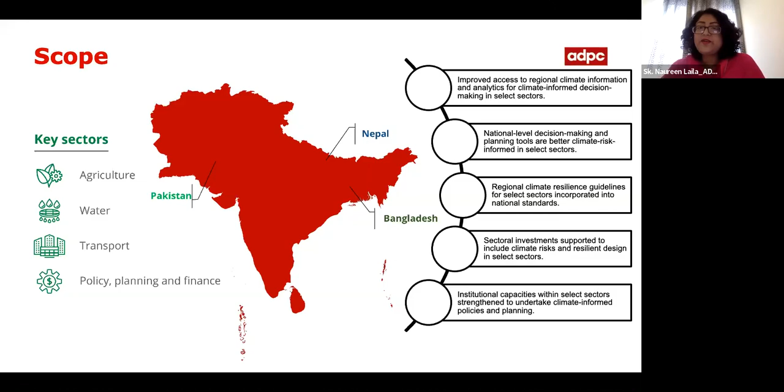This project is currently working in 3 countries: Pakistan, Nepal, and Bangladesh. For the resilient transport sector part, ADPC is working in Nepal and Bangladesh. Today we are here because we understand that the concepts and standards of resilient transport sector are a new and unique concept, and we want to build consistency and sensitization on the topic. This will be a platform where we can ask questions and get everyone on the same page, so we can start building our understanding on how to make our transport sector more resilient.

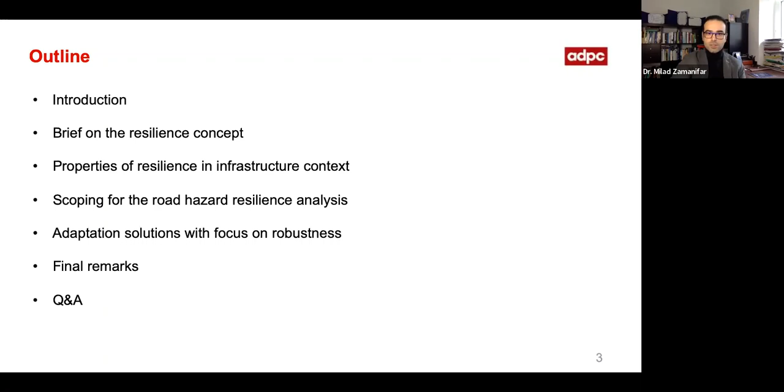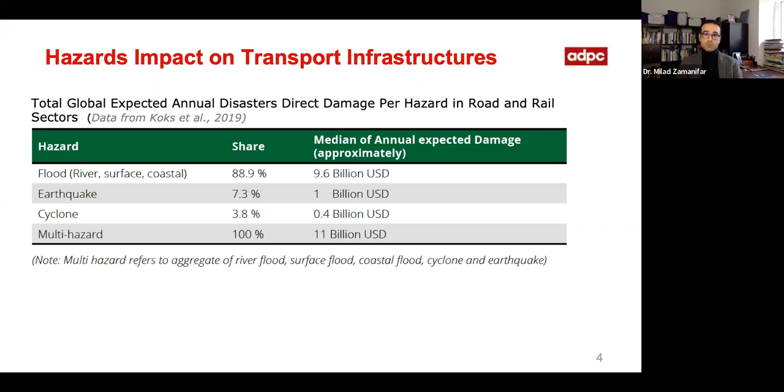I think we all agree that the adverse impact of hazards and stressors related to climate is substantial, directly contributing to economy, maintenance costs and rehabilitation. That's why we're all here today. I don't want to preach to the converted, but as we know, it's a global challenge, and South Asia is not immune to the exposure, impact, or risk from climatic hazards and stressors, particularly hydrometeorological hazards, which are our point of interest.

You can see how the situation in South Asia regarding exposure is quite critical. Of course there are various hazards. Among them, the main one known to us as civil engineers and people active in road engineering is traffic load and axle loading, which causes distress and deterioration to road infrastructure.

But for the US, for example, where climate data is already integrated into the design process, it's estimated that 36% of total damages for flexible pavements can be attributed to environmental factors and climate parameters, and 24% of total damage for rigid pavements.

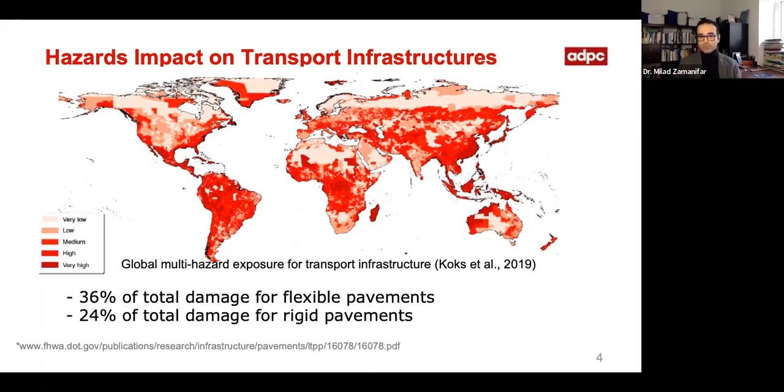It seems that hydrometeorological hazards are changing at a rate faster than our adaptation process, and the same goes for the vulnerability of assets. It's commonly acknowledged that road infrastructures are vulnerable to several climatic and non-climatic factors. Among those, we identified possible ranges of susceptibility to hydrometeorological hazards and climatic stressors in the context of road infrastructure under the CARE for South Asia project, mainly focused on this region.

I don't want to talk too much about this because I think we're all on the same page about how hydrometeorological hazards and climatic stressors impose damage on different components of road infrastructure. Not only climate stressors, but also those stressors believed to be increased or pronounced due to climate change, which road assets will undergo during their design life, but for which they are not designed.

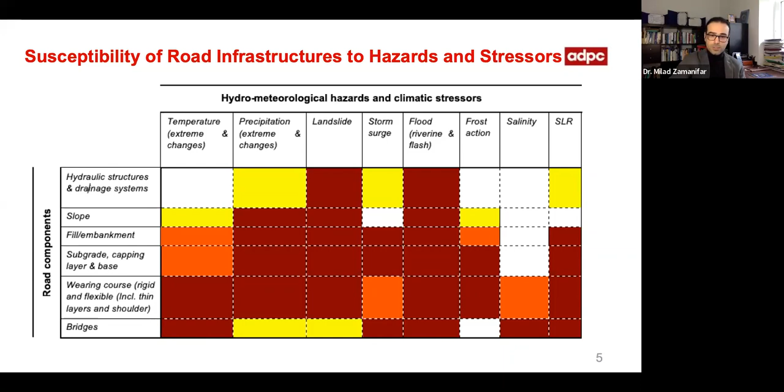Among those, we can somehow speculate that climate change for some assets in the long run would develop more susceptibility, which directly translates to maintenance and rehabilitation costs. Although we can't really figure out the exact amount, the exact extent is unknown, but the trajectory is showing an incremental trend.

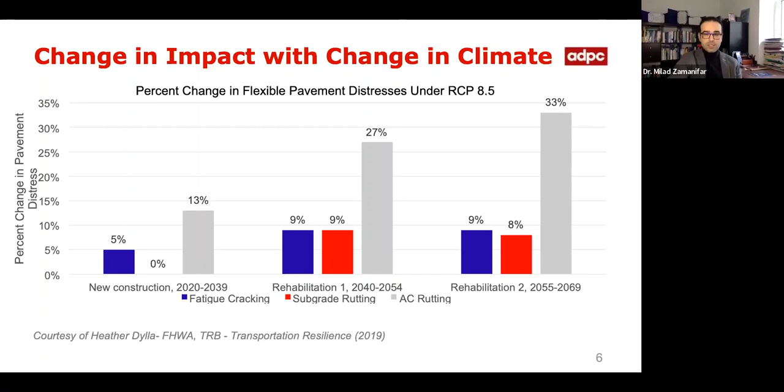In the worst case scenario, it's valid for a flexible pavement that distress will rise in the future, specifically with regard to fatigue cracking, subgrade rutting, and AC rutting. Of course, bleeding, raveling, and other deterioration would also increase, but this limited study focuses on these three agents.

So that's why resilience is an interesting concept. It's an interesting concept in engineering for us. The lexical, dictionary definition of the term resilience goes back to its Latin origin, which means springing back or bouncing back.

The resilience concept was born through engineering, mainly mechanical engineering and material science. However, it has been mainstreamed through ecology and developmental psychopathology disciplines and domains.

In the field of developmental psychopathology of children, Professor Garmezy, somewhere around the 1940s and 1950s, started to study disadvantaged children who experienced some sort of trauma and stressful life events—war, abuse, violation, hospitalization, drugs, and so forth.

He found that some of the children, statistical outliers, despite undergoing extreme distress and stressful life events, ended up just fine. They grew into healthy adults, healthy in the clinical sense, not exhibiting markers attributable to psychological disorders or diseases. So he named them resilient individuals.

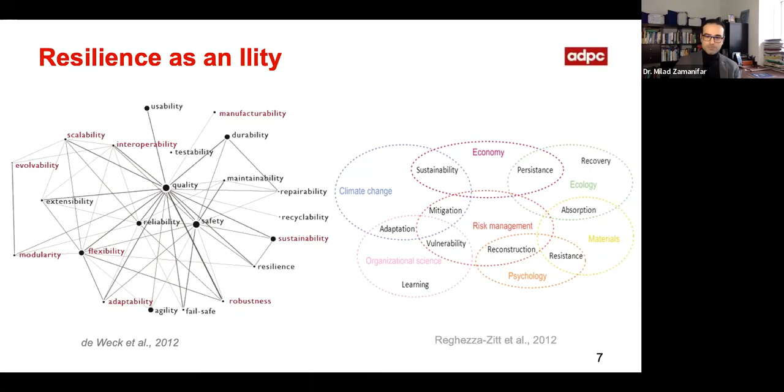Therefore, it has huge conceptual fluidity—various definitions, numerous properties, capacities, principles, dimensions, and conceptions. For example, some research discovered over 119 different definitions for resilience, and that's only until 2010. When you look at the infrastructure resilience domain specifically, it can almost reach 50 different definitions with numerous properties.

So you can see some of these properties listed here. Mainly four properties that Bruneau in 2003 suggested have been welcomed within the engineering community, such as robustness, rapidity, resourcefulness, and so forth. So the art here is to draw boundaries and limitations to the scale and scope of the investigation of resilience.

Resilience of what? Resilience to what? If you're talking about community resilience versus asset resilience, there are differences—because if you're talking about asset resilience, we probably have limited capacity to include dimensions like organizational or social dimensions. First, there were the four properties.

Later on, the learning capacity was added, but the problem is that 'learning' doesn't have an R to actually fit into the '4R' framework. Therefore, we can see the learning capacity alongside resourcefulness.

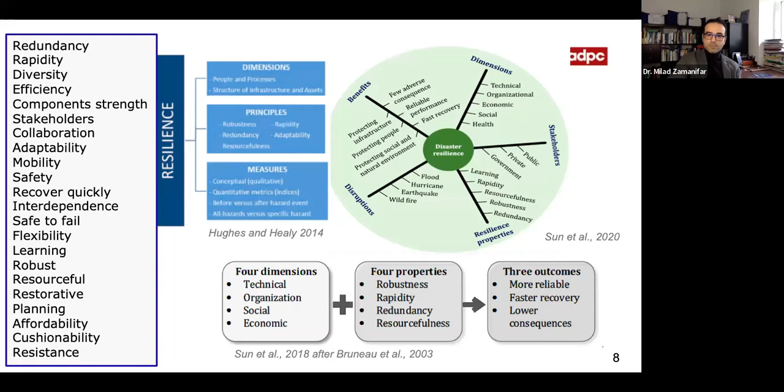We'll later on discuss more about the properties of resilience. So let's now talk about the definition.

When we look at the FHWA, Federal Highway Administration, they offer a definition: the ability to anticipate, prepare for, adapt to changing conditions, and withstand, respond to, and recover rapidly from disruption.

So it's kind of an ideology. It's more of a goal than an objective. It's overly generalized as an ideal concept rather than something that can really help us use it practically. There's too much expectation from the concept of resilience. So how can we develop road infrastructure that can anticipate, prepare, and adapt? That's where I think the problem lies.

A number of scholars and authors have expressed concern about the use of resilience as a fashionable term of late, as a buzzword, as a non-operative concept in the engineering format.

Technically, road agencies are charged to react to mandates from the policy level, from users, from the public, to respond to the mandate of resilience building without a practical tool or definition. So personally, I can understand why decision makers in road agencies are reluctant to go through with it.

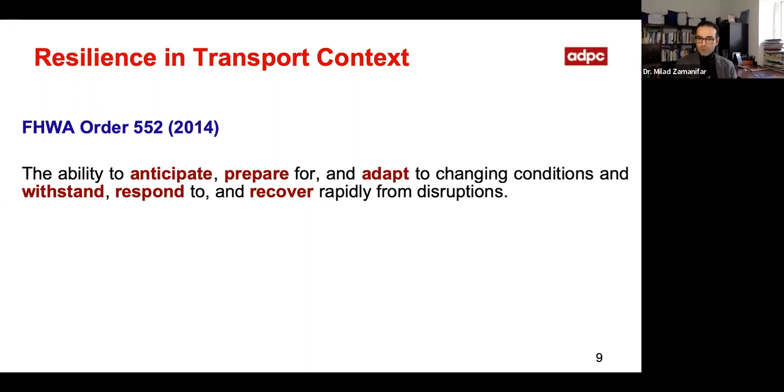Later on, in 2016, through the summit in 2009, AASHTO actually provided a more practical and easily conceivable definition: the ability of the system to provide and maintain an acceptable level of service or functionality in the face of major shocks or disruption to normal operations.

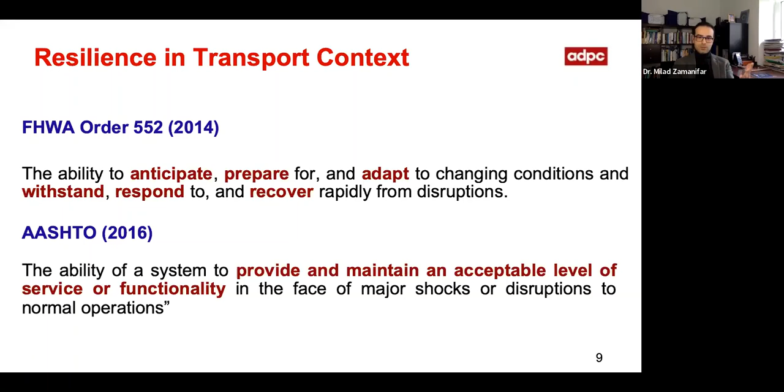That, of course, is more conceivable, but yet it does not touch on the ability of the system to react to the shock, to the hazardous event.

Here, in a seminal paper, Professor Ayyub, who I believe is at the University of Maryland now, provided a concept trying to integrate various elements. As you see, it's always about performance—some attribute that can reflect the performance of road infrastructure. You might think about performance in your area of expertise: mobility, travel time, physical condition, some sort of performance indicator that reflects how the road asset is servicing the user.

You can see that when performance drops after the strike of a hazard, it's not always that it drops significantly or that the loss occurs in just one moment. Depending on the robustness of your road asset, depending on the strength and physical condition of the asset, this can be brittle, ductile, or have graceful degradation. That graceful degradation is what we are really looking at.

Think of a landslide, for example—that's an F1, that immediately closes the road. Think of, let's say, rutting—it might come after a summer of extreme heat. It does not immediately exhibit itself as road damage.

Afterward, there's a recovery, shown in the blue arrows, indicating how fast we can restore our road asset or road network. Let's think now that resilience is not limited to the asset level—it's a network-level property. So how fast we can actually restore it matters.

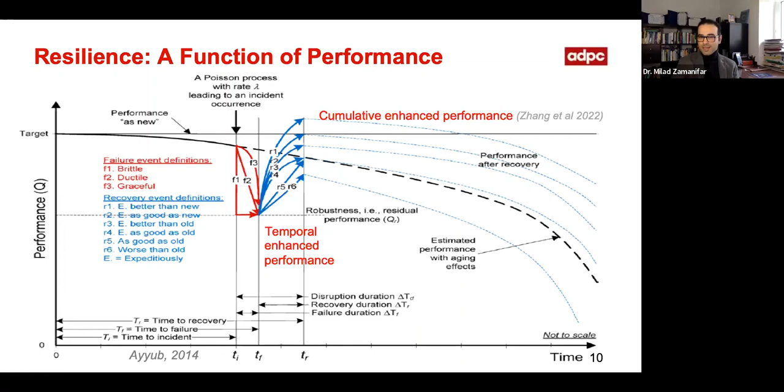At the same time, in the post-event phase, the more restorative, the more prepared and ready we are to recover the assets from degradation, the more resilience also increases. So here we're talking about the temporal sensitivity of the resilience concept. It's very important—one of the most important arguments within the definition of resilience, seeing it as a property sensitive to temporal periods and characteristics.

Resilience measures can be either ex ante, related to activities before the event aiming at reducing hazard impact, or ex post, relating to anything that happens after the event. In ex ante, robustness contributes a lot, and redundancy too—so redundancy and robustness sit in the ex ante phase before the hazard and can be reached through preparedness activity.

While rapidity comes just right after the hazard, resourcefulness contributes to both phases. For example, if you remember the West Germany flooding last year, around July, they were relatively strong in post-event measures—everything was quite good—but they failed to build redundancy and robustness through risk assessment prior to the event.

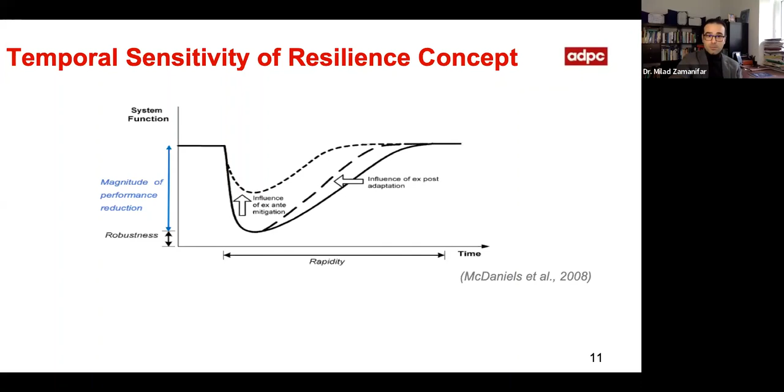So if we fail in one of these phases or properties, we actually plan for failure. Both phases, ex ante and ex post, should be developed simultaneously. Ex ante is before the adverse event, ex post is after the adverse event. However, that's only valid for sudden onset hazards, for example flash flood or earthquake.

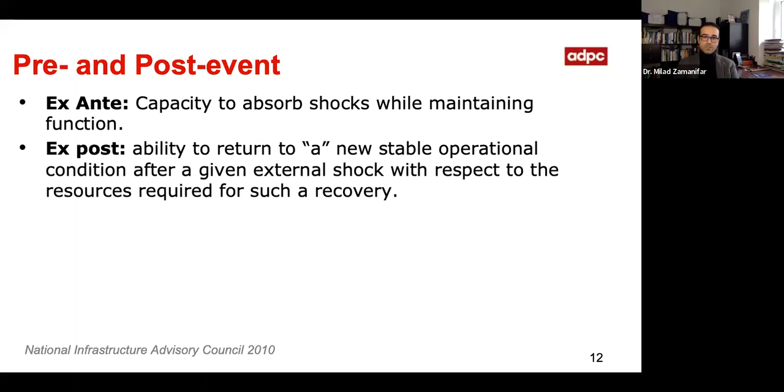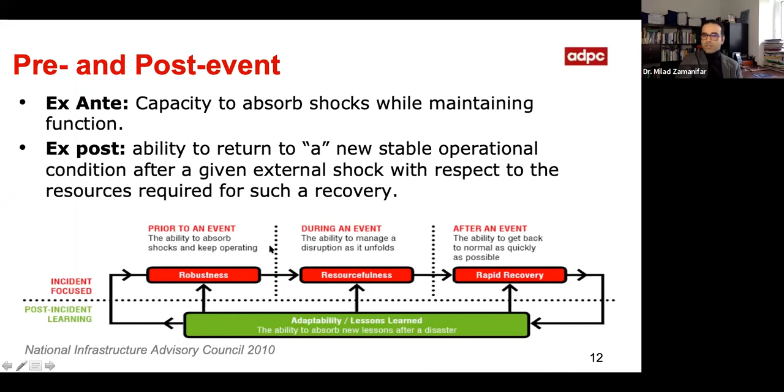But in road infrastructure context, we also have climatic stressors that act as slow onset hazards, like extreme temperature, heavy precipitation, monsoon seasons, where we don't see immediate failure of the system due to the hazard, but it reflects itself sometime later, for example as stripping or raveling. Therefore, some research discusses how we should also consider the during-event phase. So this temporal sensitivity is actually recognized vastly in the community.

So I finalized here that the concept of resilient infrastructure can be perceived as a degree of possessing a set of capabilities, abilities that indicate both properties and behavior of the system. If we are talking about ex ante, we are talking about the static behavior, static properties of the system. We are talking in a descriptive form, describing the current condition of the asset. That's what we are interested in.

We are talking about the state of the system regarding current condition and how it can withstand hazards. Or we talk about ex post, mostly interested in what the system does after the event. It's dynamic and normative. Normativity indicates how it ought to be, how it's expected to be, relating to the behavior of the system in presence of a certain major shock, until it relaxes into a new state of equilibrium.

From this comprehensive reach that we are expecting resilience to cover, we are pushing the concept of resilience to address somehow a wide spectrum of expectations, and it's difficult to arrive at operational indicators with this wide spectrum.

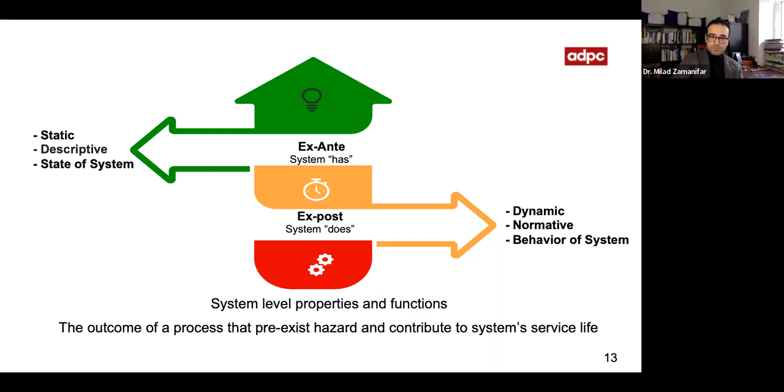Therefore, here is what scoping can provide: strategic decisions. It's documented that reports show a failure rate of 50%. It gets worse once we use multi-criteria decision making, where we have different attributes, different decision factors involved.

So without proper scoping and limiting the boundary of the problem, we won't be able to solve it with reasonable computational complexity. But most importantly, we would not find the opportunity to understand the problem without disaggregating, breaking it down, and downscaling the problem through scoping.

For that, the most critical step, I would say even the most often ignored step, is scoping. We call it here scoping, but the original term would be problem structuring. It is advised in the decision analysis literature.

So infrastructure resilience scope starts with the dimension. We previously showed that it can be social, technical, and temporality, ex ante or ex post, before the event or after the event. Then the hazard system: whether we have a multi-hazard approach or focus on a single hazard, and whether these hazards are all climatic, or a mix of non-climatic and climatic.

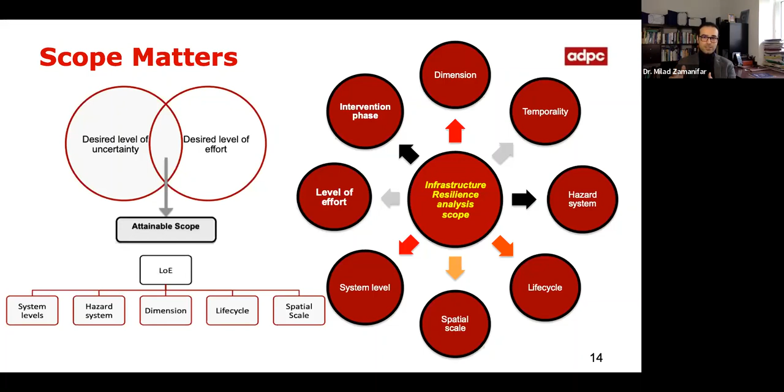All the temporality, all the intervention phases like preparedness, recovery, multi-hazard - although that's what we seek, that's what we always hear from keynote speakers, that we need multi-hazard, all-hazard included, life cycle, system level thinking. But when you put it on paper and really try to do that, you realize you end up with a result, but the result is not associated with sufficient reliability and sufficient certainty to be used at an operational level.

So let's talk about the properties now. They are very important. Just a moment.

So redundancy, as we know, is the buffer capacity—that's quite a clear property. If one component fails, another one compensates. Let's say if we have a flash flood, a design flood, we provide some additional culverts to compensate if the real flash flood exceeds our design flash flood.

Or reliability-based design, where we introduce a factor of safety, some sort of coefficient that brings our design parameter a little bit higher. Alternative routes for critical nodes: when we have a node that is significantly important for us, for example, providing water to the community or connecting the community to basic care, we would like to have some sort of contingency plan.

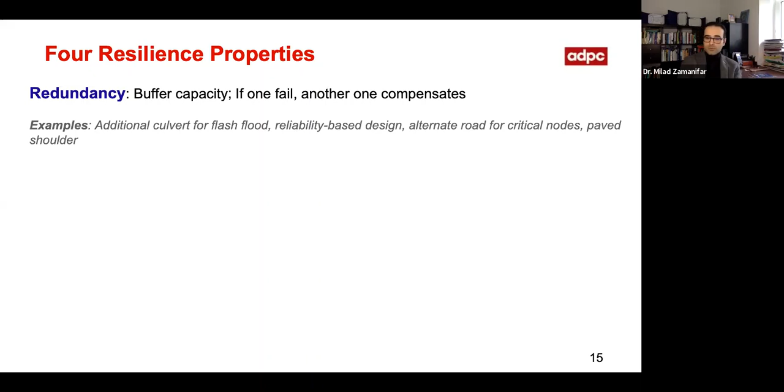Paved shoulder: if a landslide occurs, for example, the opposite shoulder can be used as a driveway. Then let's talk about...

Rapidity. It's very simple—it's quick recovery. There is a huge amount of literature, for example, about recovery planning since 1970. At that time they didn't use the term resilience. So here we should signify the difference between the concept of resilience and the term resilience. In disaster recovery planning, the concept of resilience has been used since 1970, but not the term. However, these days the term has been used significantly, but the concept is quite missing.

Another one is resourcefulness. That's a little vague—something difficult to quantify, but it's sort of addressing navigating resources and intervention in response to a shock, or for preparedness before the adverse event, and of course during an event. Like anything related to planning, finance, policy, knowledge, standards.

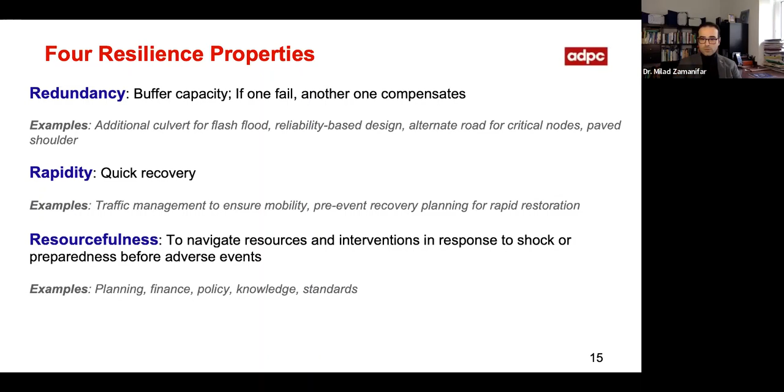So in the Care for South Asia project, we actually have different sectors approaching the concept and property of resourcefulness in the resilience approach. Robustness is what we are more interested in.

It's about the structural strength and integrity of the asset, the extent to which the system is not driven to zero. It's still performing—although the shock is there, the stress is there—but the system can still provide some level of service to the users.

For example, polymer modified bitumens that can improve the strength against extreme heat and rutting. Rigid pavements show quite a good performance regarding inundation. Of course, we should not naively consider them as fully resilient pavement. Anti-corrosion material in the maritime environment, and of course the maintenance regime that we want to take over.

So why do we need all these properties for our analysis, and why do properties matter? They matter because they allow us to disaggregate an abstract concept like resilience, breaking it into small parts, to a more analytically tractable and understandable component. They are also important since they assist with navigating proper attributes, defining the attributes, and evaluating resilience for our assets. So selecting properties is a primary target of the scoping, and is a very important step toward arriving at indicators and measurement of resilience.

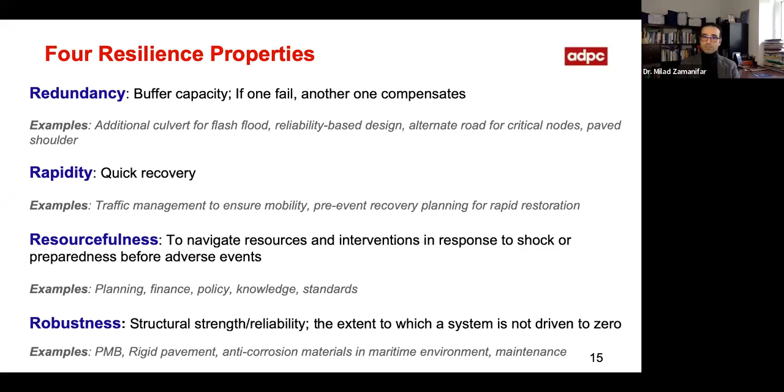So here we want to go more technical, and we want to go through some examples. For that, let's think about extreme precipitation and the impact on road assets. There are, of course, various failures that can occur relating to different components of the road structure.

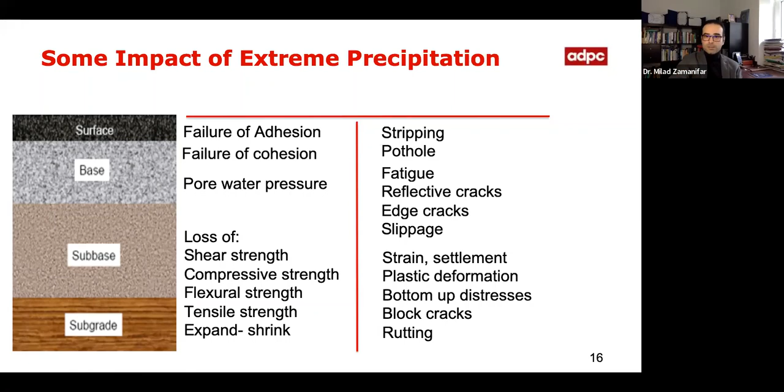Is it in the surface, in the base? For example, capillary effects, the impact of trapped water between the base and sub-base, swelling and shrinking of the soils—they can show their effect through different distresses: stripping, pothole, fatigue, reflective cracks, which are bottom-up deteriorations, and so forth.

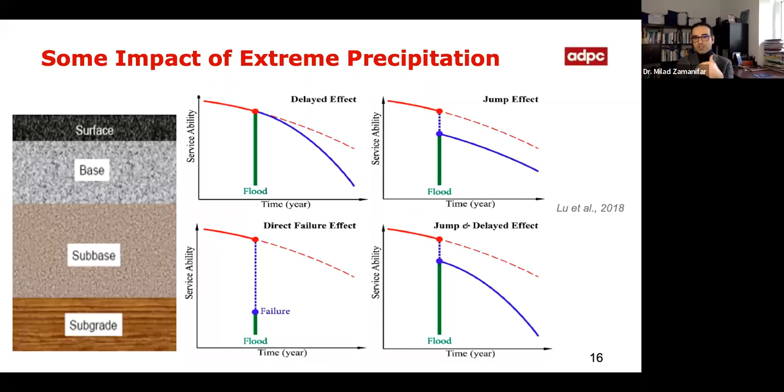What we should actually consider is that not all the adverse effects emerge immediately after the stressor. Some of them are delayed; some we just see after a season, after a winter or after a summer, for example. Some have a jump effect, some you can immediately see the effect—for example, force of water, flood, it's totally destroyed and you see it immediately. And some of them have both properties: you see the immediate effect, and they also impact the rate of deterioration in the future, so the damage will continue to impact the road.

So I would like here to hold a quick quiz, but first I would like to explain about different pavements. Let's say that we are decision makers, we want to make a decision, or design engineers, and we have three options.

We want to come to an understanding of which option is more likely to be resilient to heavy precipitation, because we already made a study and realized that the road we are doing in this area is exposed to heavy precipitation.

Option A: asphalt concrete, 40 millimeters thickness, with 19% air volume, using bitumen of 67 penetration grade plus 0.3% polyamide. Base has a 10% fine granule base.

We will use undersill, edge drain, and under drain, and subgrade arriving at a CBR, California bearing ratio, of 9%. The soil of the subgrade is sand.

Option B, however, is a little thicker, quite dense with 4% void, and has a really strong binder bitumen because it is modified with SBS 5%.

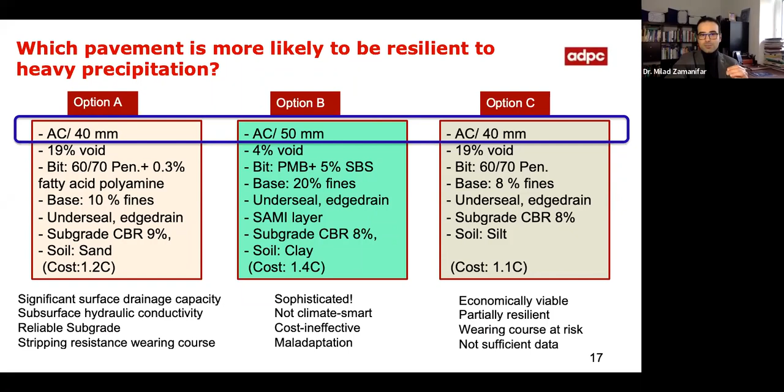Now let's zoom in, just for the wearing courses. Let's see how a small change in a small component of our road pavement system would change things. Which wearing course, which top cut, is more likely to be resilient to extreme temperature this time? I'll explain a little bit.

The first option is grade 0 to 11, very dense, 2%, thickness is 30 millimeters, and bitumen content is 6.8 - quite a rich mortar mixture. It's a void filled bitumen, 82%, with a high filler content, 9%. But Marshall stability is 900 kilogram, and it's a gap grade.

Second option is dense grade again, less bitumen with a high Marshall stability. Option 3 is 40 millimeter thickness, bitumen content of 5.3, with a Marshall stability of 960. This is an open grade, like porous asphalt. The middle one is the usual conventional asphalt concrete, AC. Option A is a gap grade.

So what do you think about the extreme temperature sensitivity of these three options? Would you please pull up the poll?

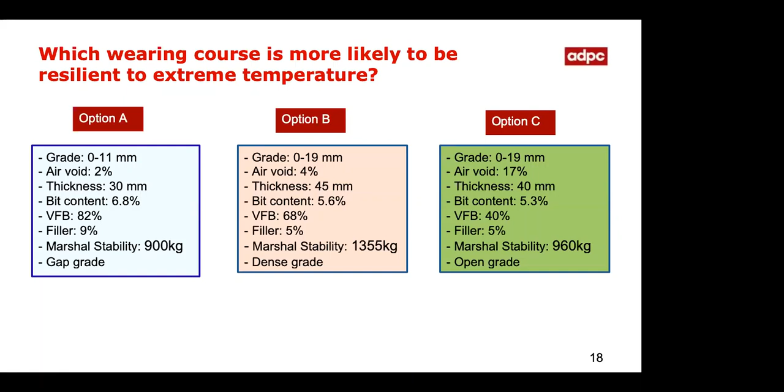I think we have the answers, Milad. You can see the poll results, right? So I think, as usual, just like last time, option B got the highest vote - 45% of people voted, then C, and then A. So please, let's see.

Option B has a very low mechanical resistance, with a very low filler content. It's easy to apply and rut sensitive. But of course it has high Marshall stability because the VFB is a very determining factor. Given the good bitumen content and thickness, it provides a reasonably good Marshall stability. But it is rut sensitive, and very easy to apply. I would say it's a very interesting option, so I would take it as a second choice.

Option A is significantly rut resistant because it is gap grade, and gap grades are based on the stone skeleton structure - stone by stone by stone, with a high share of coarse aggregates and a high share of binder. It's not only expecting structural resilience from the binder mix of bitumen and filler, but also from the stone structure that provides great rutting resistance. One example would be stone mastic asphalt. It's relatively expensive, maybe 1.3 times conventional cost, but it is an efficient and cost-effective option.

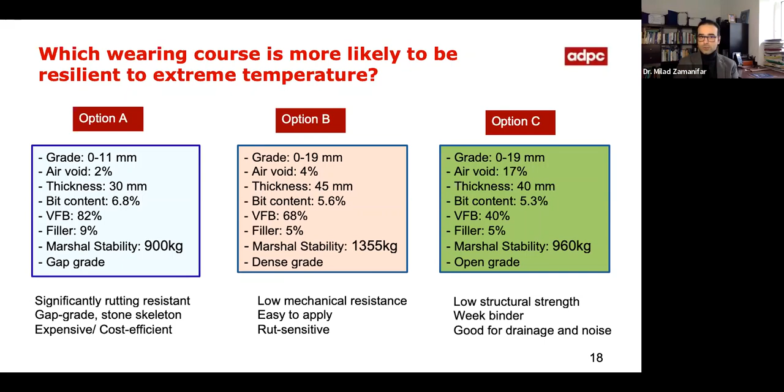So let's go back to the first question, and now let's include both precipitation and temperature as a hazard system. A hazard system is how many hazards we include in our basket of hazards to study. In this system, we have two hazard agents: precipitation and temperature. I think that might be, for example, the case in Bangladesh.

Same options as the first question. If you remember, we speculated that option A might be the good option. But what if we add extreme temperature to the precipitation in this form? Which option would now be more likely to be resilient to both heavy precipitation and extreme temperature? I think after 5-10 seconds you can open the polls.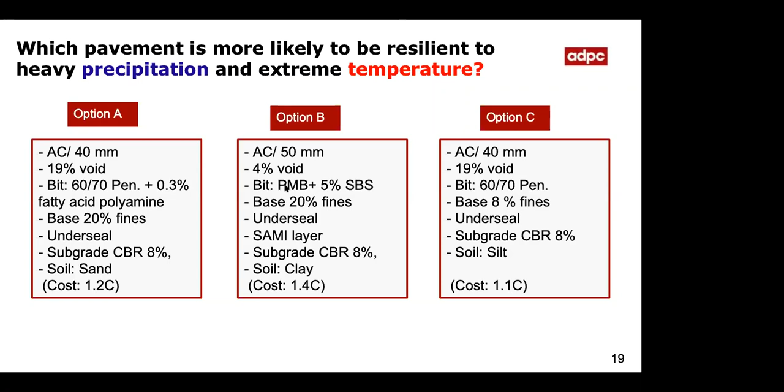Great, I really appreciate that you participate, because it matters that we put thought into this - even just a few seconds of thinking. Sometimes in practice we don't get the luxury of having more information than what we have here. But of course we need more sophisticated investigation; we need to get much deeper and investigate the problem in a wider spectrum.

But sometimes the reality is like this. Let's see the options here. Option A is a very great option for extreme heat, but for heavy precipitation, it's the other way around—it's very good for heavy precipitation, as we discussed in the first question, but not a good one for extreme heat, because the anti-stripping agent does not really increase the strength of the binder, only reducing the moisture sensitivity. And since we have a high air void, that means we are very rutting sensitive.

Option B, on the other hand, is very good, because it's a polymer modified bitumen. It shows significantly good behavior regarding extreme heat and rutting. But as we discussed in the first question, it is not a good option for heavy precipitation. Option C, however, is definitely not good for extreme heat, and for heavy precipitation we need more data.

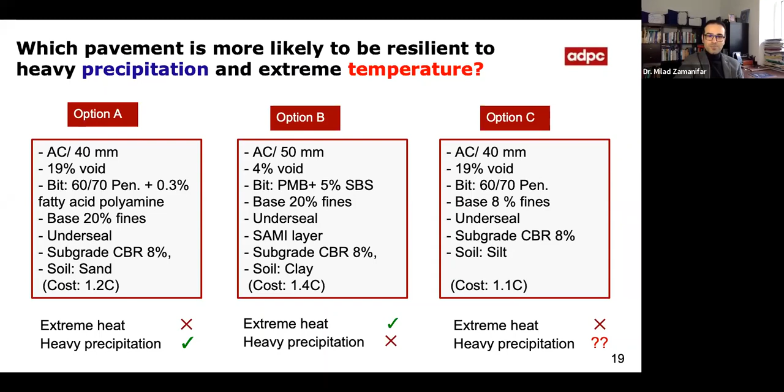So let's go back to the scope of the resilience analysis here. The idea is that we want to reach from the scope to the properties. We select the properties based on the scope, and from the properties arrive at the attributes, which we can somehow select among, and then go to each road section and do the screening, collect the data, and provide an evaluation that gives us an impression of how resilient our asset under investigation is.

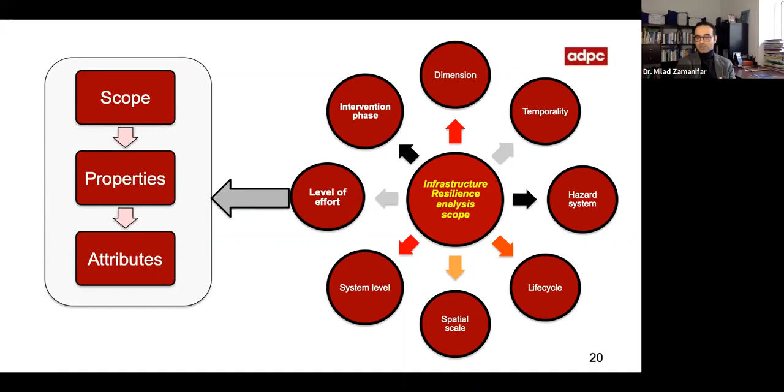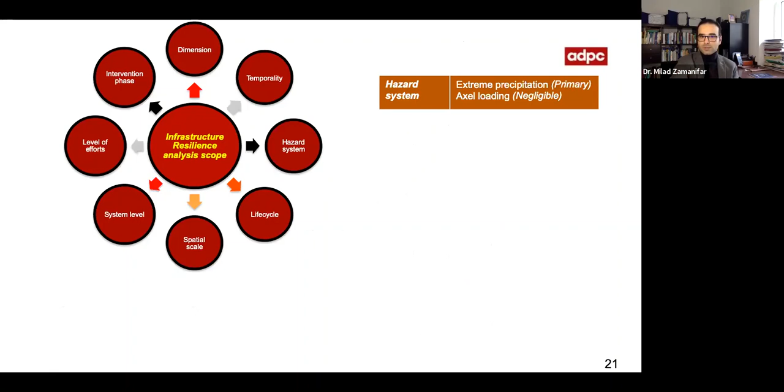For that, let's have one example. Let's say we choose the hazard as extreme precipitation primarily. Of course, the hazard system is not just about one hazard—that's important also in design. We should not just take one hazard as the leading governing factor, but always consider the combination of hazards. Let's say, for the life cycle, we consider climate change, recognizing its impact on the asset at 80% of the design life.

But of course we should consider that when the design life is 10 years, the impact of climate change regarding extreme temperature is almost negligible. In 10 years we design the road assets, but for assets with a longer design life, like a bridge, culvert, or highway designed for 30 years, we should absolutely take into account the impact of climate change.

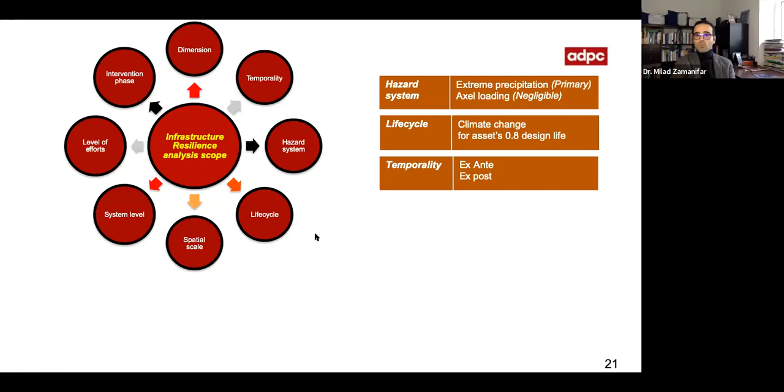And for temporality, we would like to evaluate our assets based on ex ante and ex post—before and after the event. The system level would be pavement system. We also want to look at the network level impact, and the spatial scale would be rural and at the province level. The dimension would be just technical—we don't have the luxury of evaluating all possible dimensions. And level of effort is a concern for everybody.

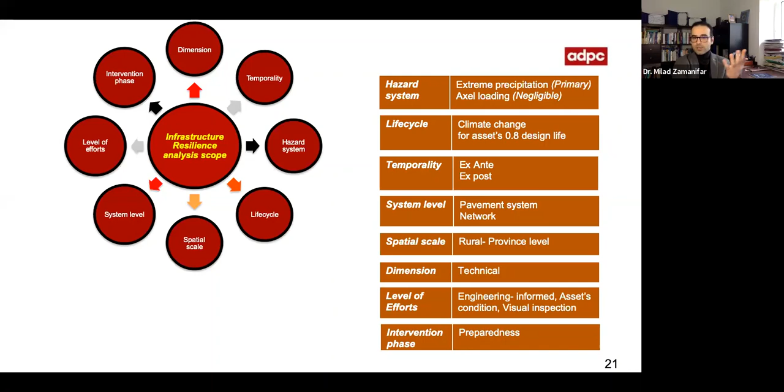We don't want to conduct really sophisticated modeling or lab tests. We want our experts to go on site, observe the asset's condition, do some survey, visual inspection, and provide engineering-informed data. The intervention phase is preparedness, meaning in this evaluation we choose not to look at recovery capacities.

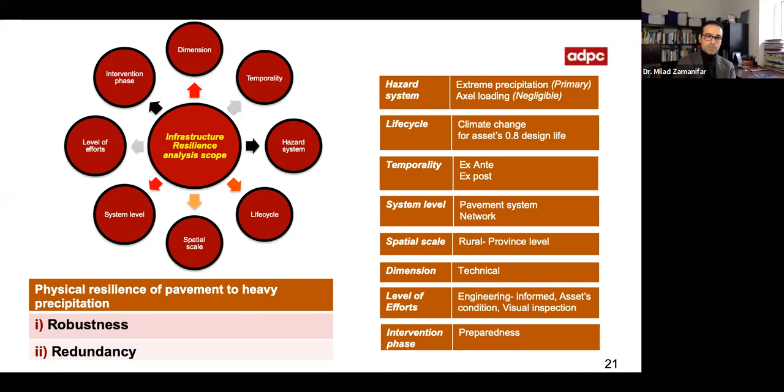Based on that, we might end up with two properties out of the four properties from Bruneau and colleagues, 2003—robustness and redundancy. But before I go to the indicators, here's another question, though there's no poll for it.

Based on what I explained about the scope in the first question, let's think about what this scoping would mean for this question. When we want to evaluate the pavement's resilience to heavy precipitation, which temporality are we considering? I'd say ex ante—the preparedness, the robustness we're interested in before the event. On which dimension? Absolutely technical, physical assets. And which system level? If it's an asset level, it's a component level evaluation—you're not looking at network characteristics.

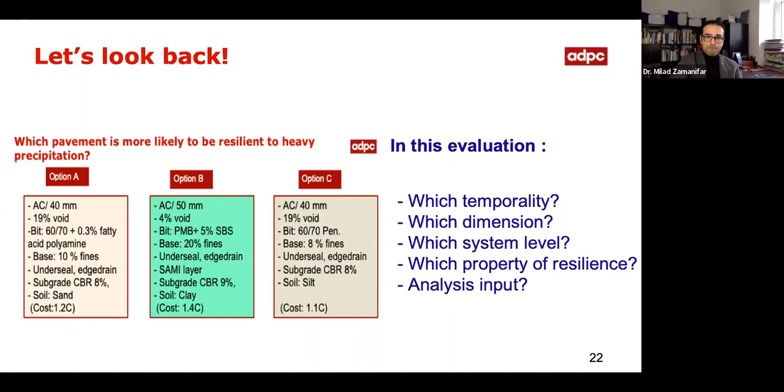And which property of resilience? It's clear that it's robustness. Our analysis input would be engineering-informed—asset lab sheets, construction documents, or maintenance reports. So regarding the two properties we chose to further our investigation, for robustness, there are several factors contributing to the strength and resistance of road assets to heavy precipitation. That's the property we consider for assets exposed to water-induced hazards. One very important factor is the drainage capacity of the base course.

We don't want our base course to trap water or create pore water pressure, which is the hydraulic force of the water that can contribute to a convex curve and make our pavement significantly susceptible to compressive strain or flexural strain.

Drainage capacity of the wearing course is also important. Attributes such as macro texture prevent hydroplaning and provide some surface drainage through the overlay of the road. In some mixtures the macro texture can be up to 2 millimeters, but in normal asphalt concrete it's normally between 0.5 and 1. Surface drainage capacity, where we have a side ditch, is performing well.

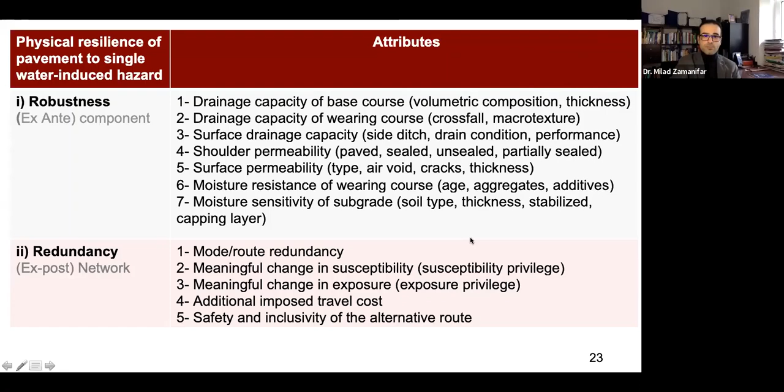So let's talk about the indicators I previously discussed. Stripping is one of the major problems we see in areas with moisture sensitivity and high exposure to precipitation. It's usually based on the theory that aggregate with more than 50 to 65% silica might exhibit an acidic environment, and therefore be more hydrophilic — they are scared of the bitumen and do not provide the cover we intend to have.

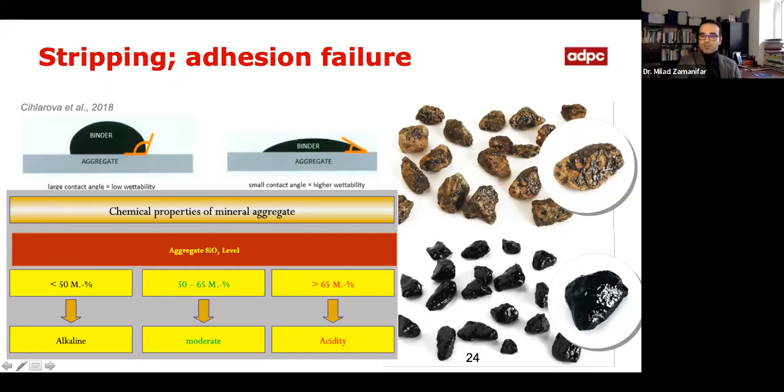But when aggregates are hydrophobic, they hate the water — it's like the aggregate is hugging its long lost uncle, the bitumen, and therefore provides a good amount of cover. That's the full coverage we want to have, which is easily achievable by using anti-strippers. Anti-strippers are hugely important for us in areas of susceptibility.

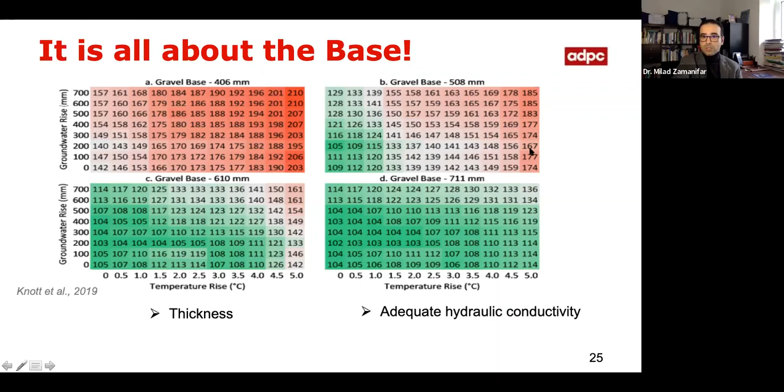Base layer is very important. That's why we have two indicators addressing the base layer, not only the thickness, but also the hydraulic conductivity. One study shows that the thickness of the base needed to resist groundwater rise should significantly increase to no longer be in the risk area. The change in moisture content, the saturation degree, is very important for both the base layer and the subgrade.

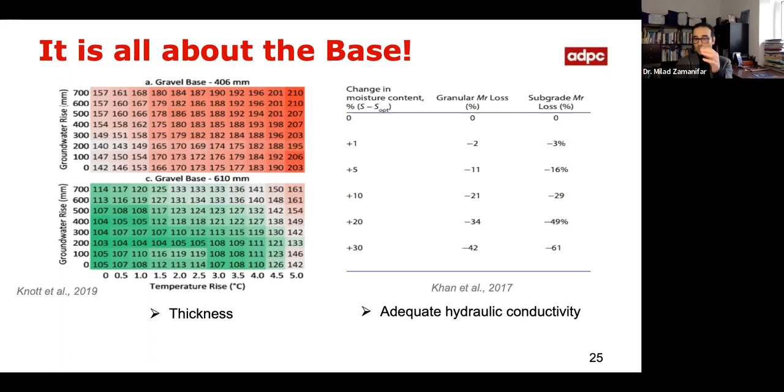You can see that with the change in the moisture content, how much resilient modulus you will lose, a very important parameter we use in the design of the pavement system.

Age and surface condition are also important. I think you'll agree that surface condition and cracks, for example, can allow for infiltration of water. This study shows very well how uncracked surfaces behave and perform differently compared to cracked surfaces.

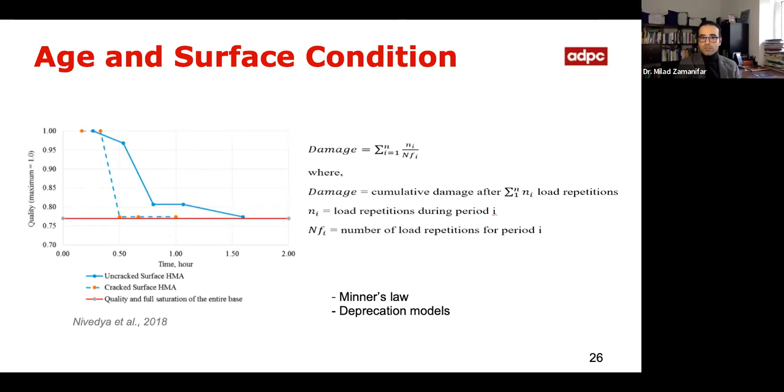Drainage system is also very important. A pavement with a similar structure but different drainage condition can show significantly different behavior regarding degree of saturation. The structural capacity of a pavement with fair functioning drainage recovers considerably faster after rainfall, while the pavement with poor drainage capacity stays with lower structural capacity for a relatively longer time.

It might take up to 3 years for the subgrade to be totally drained out from the impact of flood. From 1 to 3 years is the possible time for the pavement system to regain the strength it lost due to saturation. Through this 0 to 3 year period, it can lose up to 60% of its load-bearing capacity, or CBR, just because it has been fully soaked. So recovery time also significantly depends on the available drainage capacity, which I see as a significant problem mostly in South Asia.

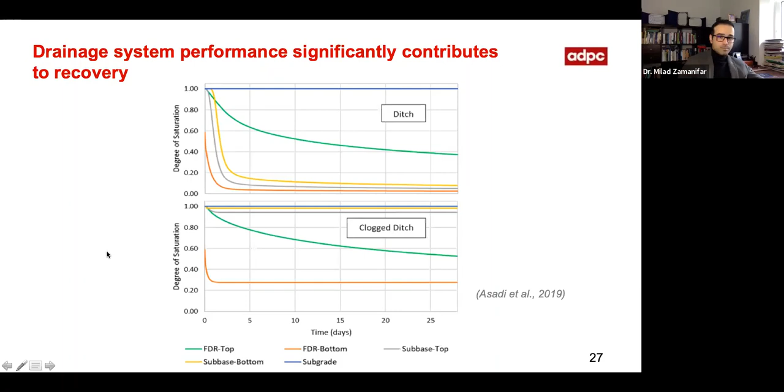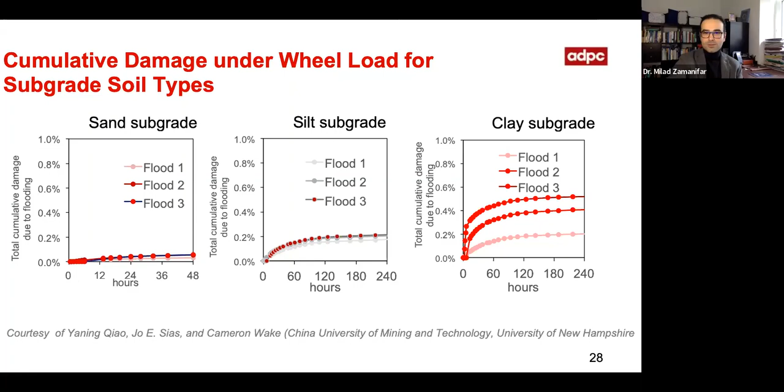So here we offer some adaptation options, but you can see there's some sort of resilience window. Where do you want to build the resilience - in the design, construction, or operational phase? Of course, if you don't want to see only robustness, you can also use the risk assessment method in the planning phase. It's very important where you locate your assets.

In the design phase, it depends on your strategy. For example, for wearing course, you can have a strategy of letting the water drain down with a subsurface drainage system, or you can have a different strategy, using for example lower air void design to not let the water infiltrate from the beginning. So there are some options.

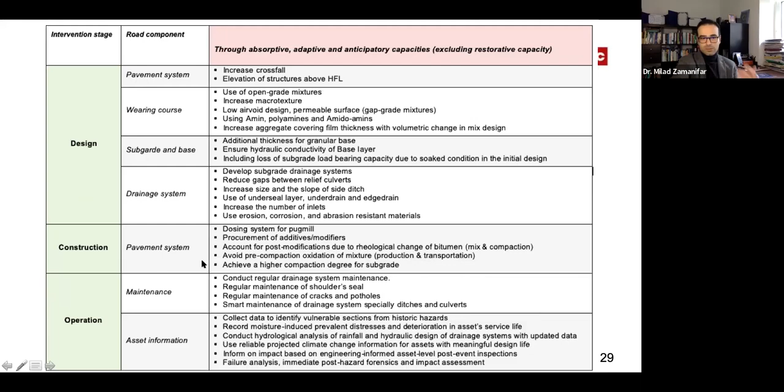Maybe we need another webinar, 40 minutes, to just talk about each one by each one. But with this slide, you can really study that. Then we have gap grade and dense grade, which we already discussed in one of the questions.

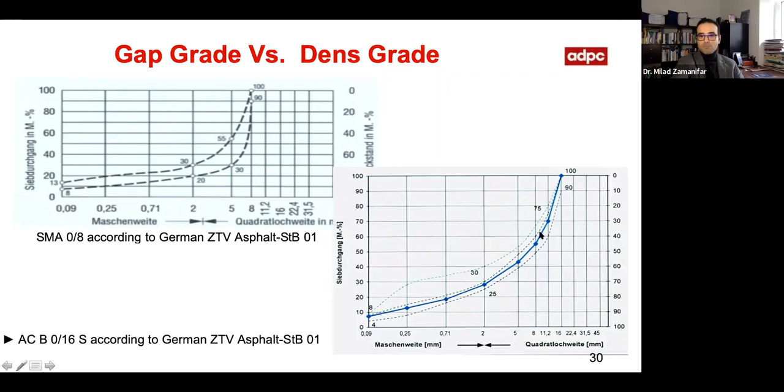The gap grades actually have a kind of broken curve, with a high share of coarse aggregate and high share of filler, unlike the normal conventional continuous gradation of our normal conventional asphalt concrete. Open grade, however, has lots of coarse aggregate and very little aggregate around sieve number 4, and then they have a high amount of air voids as well.

So there are different possibilities. We should not just go with one option, but have a choice of variability to choose based on the degree of exposure, and of course the recorded or observed damage that has been seen in the road asset.

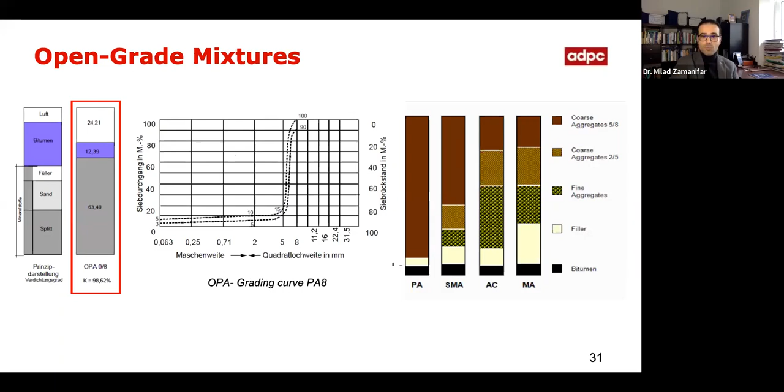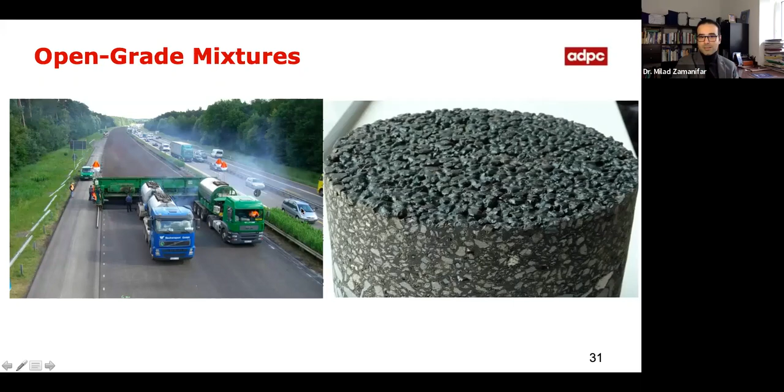Even these days, they are still initiating efforts to develop what they call progressive mastic asphalt. Here you see it doesn't even need a roller for compacting the asphalt - it's just self-compacting asphalt. It's significantly rut resistant, but of course it's very costly and expensive.

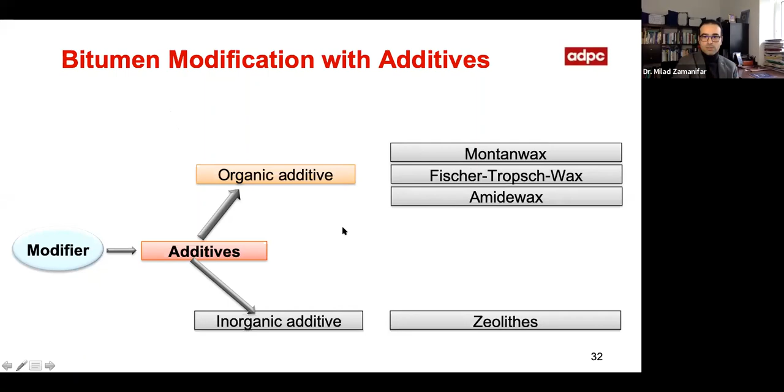You can modify your bitumens with additives - we have different additives like Fischer-Tropsch wax, Montan wax, amide wax. The amide waxes are very good anti-strippers. There are hundreds of anti-strippers, and I think they're often regionally produced as well. You can see how different anti-strippers can really impact the adhesion and bond between the bitumen and the aggregates.

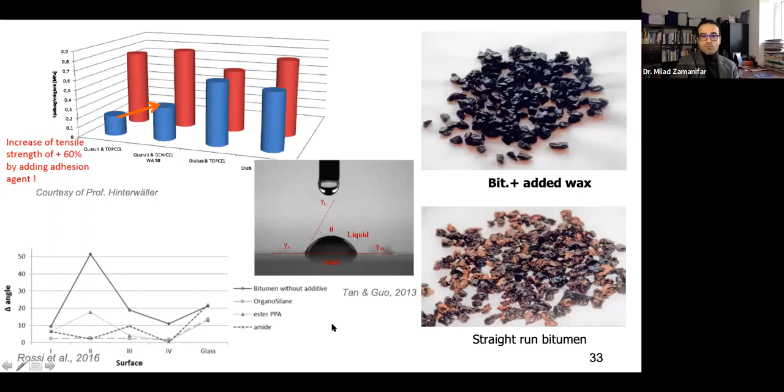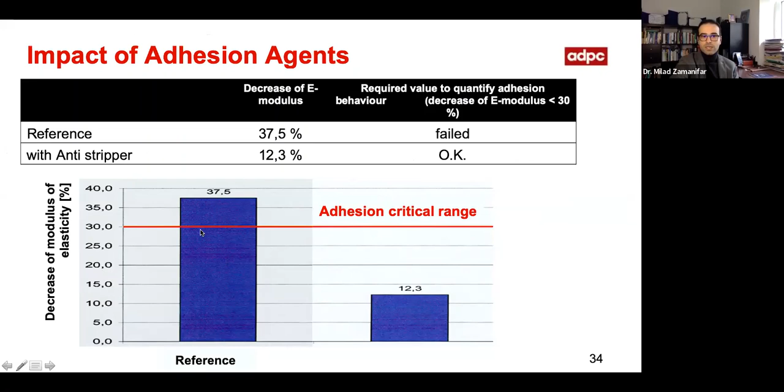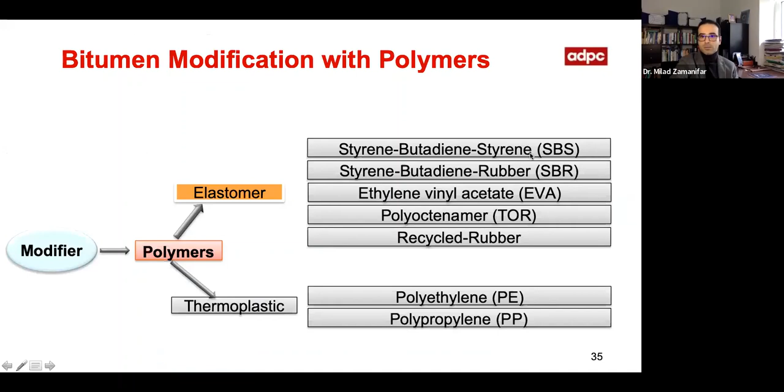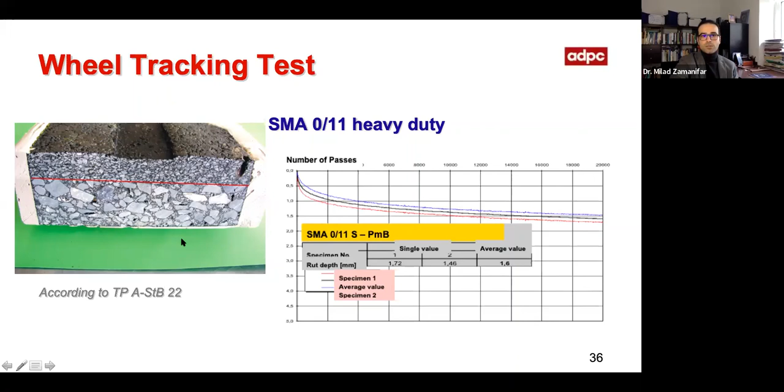So here the Hamburg wheel tracking test. I don't know if it's available, I think it's in my last slide. If I don't have it, let me take a moment.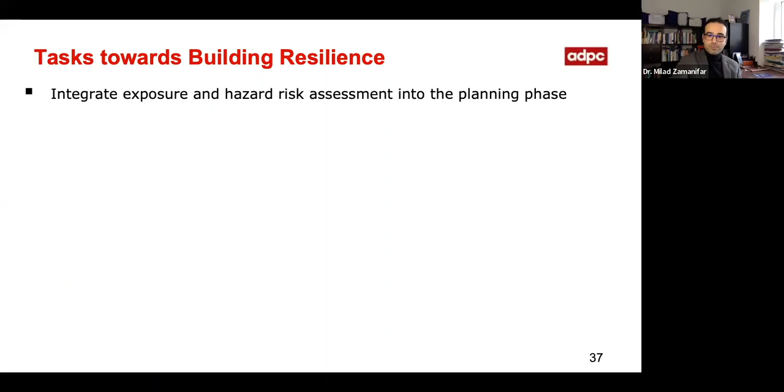In some cases you don't need to really change the design, but what should be changed is the design input that we are feeding into our design process. For example, exceedance probability - we don't really need to change that from 20 to 30 years. Probably we don't get the result if we change the flood interval period.

What we should change is the input of our hydrologic model, based on the fact that possible climate change induced flood in the next 30 years would have a higher velocity or a higher discharge rate.

Something very important is that we should include climate information, especially precipitation and temperature, as a governing factor, as a leading factor of the design process. So far what I see in South Asia is always about the CBR, about axial loading. Of course they are important, but they are not the only hazards.

There are lots of countries that already started - in Australia, climate zones are an inevitable part of the design. Frost depth in Germany - if you open the German design standard, you'll see that next to the traffic loading, there's a frost depth also. Flood probability is used in the Netherlands, and climate modeling, precipitation, UV, temperature is also used.

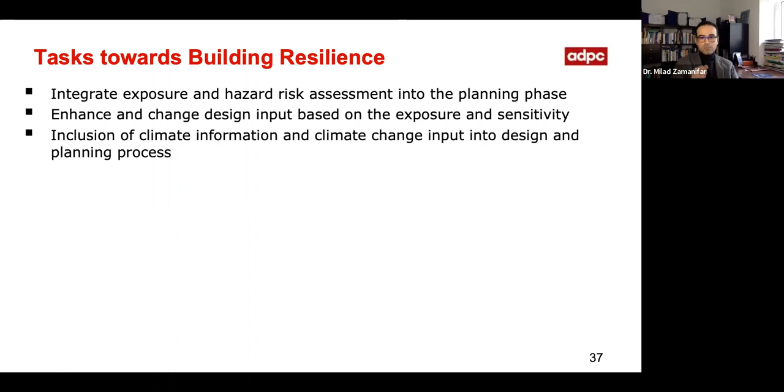The mechanistic-empirical pavement design guideline - they have also one fully integrated climate model within that to account for the climate information. And this climate information should definitely be up to date. The flood information from 1982 might not really be the reliable input for our design.

New materials based on vulnerability - we should maybe do one webinar about new materials and innovative materials, as there are lots of misunderstanding about that. Enhanced level of investigation - simplification is the hazard itself.

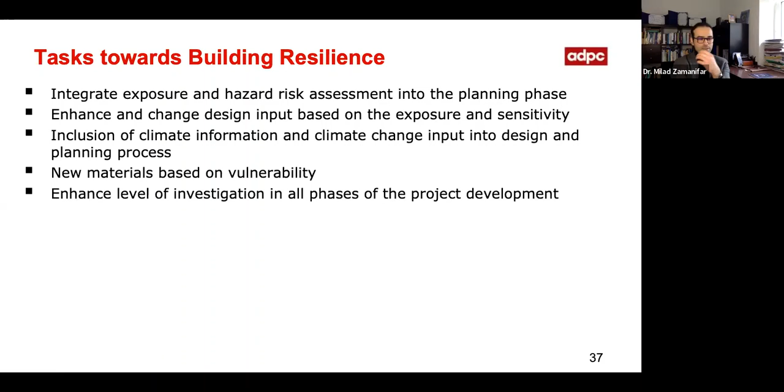I see that we would like to have a design very quickly, exactly with the design that we understand, but believe me guys, we need a more sophisticated level of investigation. We need to dedicate time and effort for problem structuring, collecting data, analyzing data, and tailoring our design for the hazard that our asset will experience in the design life.

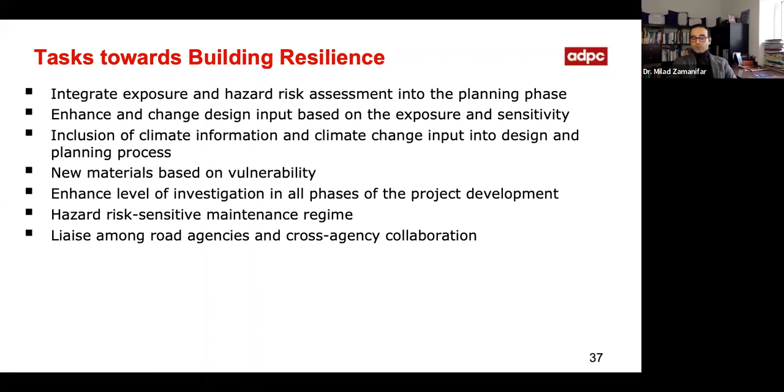Hazard risk sensitive maintenance regime - of course there are lots of constraints and limitations that road agencies are facing. For example, a road agency would like to control the groundwater table, but another agency, let's say agriculture, would say no, I want more watering for my agriculture sector here. So managing a detention drainage basin or watershed basin really requires collaboration between different agencies.

Redundancy is very important for critical assets, whether they are critical, vulnerable, or highly exposed. So you should really find a trade-off between these three indicators to use that.

Resource allocation for actually supporting the rapidity, life cycle, system level thinking, and multidisciplinary thinking. Lots of this resilience analysis and prioritization all require a high degree of multidisciplinary knowledge.

For example, you should be very much aware of uncertainty - uncertainty analysis is your best friend. Be very sensitive about the decisions, about the decision recommendations you get from decision models. They can be very misleading if we don't really go through finding the uncertainty sources, because they are vulnerable to both errors and cognitive biases. So we should have knowledge of conducting good decision analytics in our planning and prioritization.